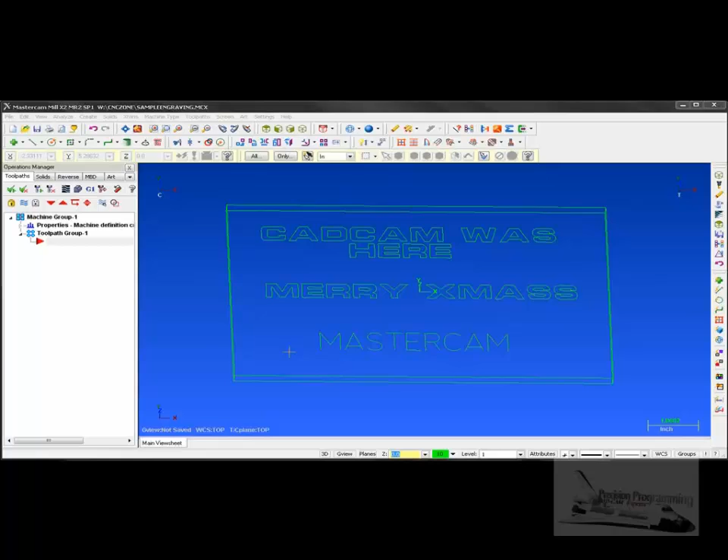We're going to go ahead and use the information on the screen right now. I'm going to put this in top view and adjust that a little bit.

Right here I'm going to use standard engraving. By standard engraving I'm going to use a contour option, so I'll use toolpath, contour. This is sample engraving, that's fine.

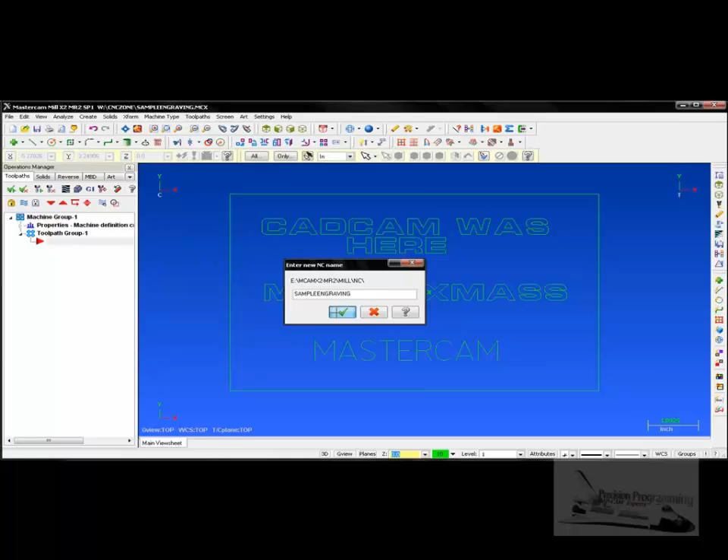Using my chaining option, I'm actually going to use the option for window, so I'm going to put a window around where it says Mastercam. Now it's asking me for a sketch approximate start point.

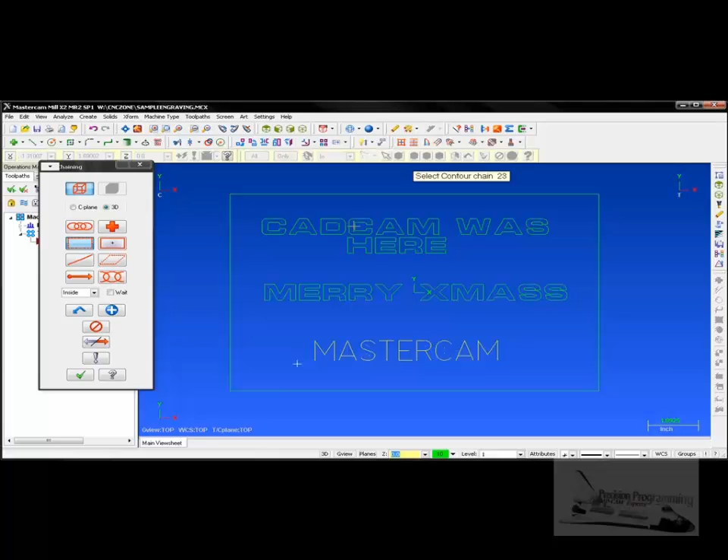Looking for a tool. In this case I'll go ahead and say none, and I'll use a spot drill. We'll say ignore, see what we have in our list. I'm going to use a 125.

Okay, I'm not worrying about the feeds and speeds at this time. Rapids, everything's good. Go over to contour parameters.

I'm going to look for, say, minus 0.005. Maybe multiple passes if I wanted, so I could say 0.002, 2 thousandths pass per cut.

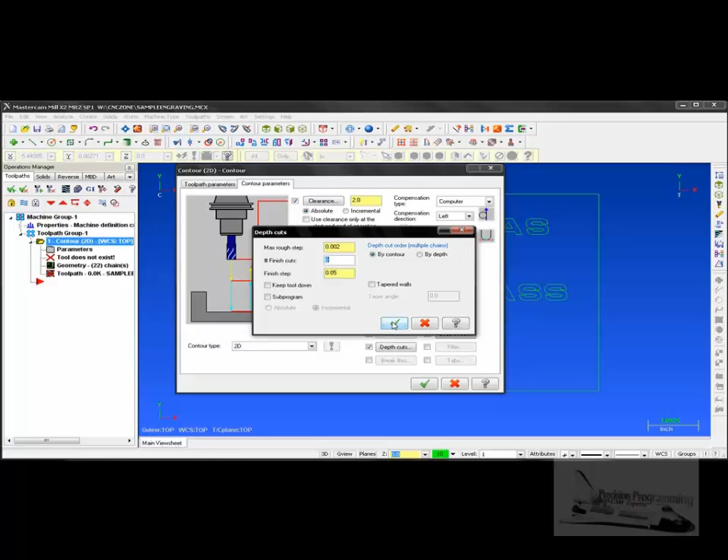I'm going to turn off the lead in and lead out because I don't want the tool to create like a lead in and lead out, making it look like calligraphy. But what I do want is for the tool to go right down the center of these letters. You can see we have stick letters, and I'd like that tool to go right down the center there.

So to do that easily, I'm just going to go over to here where it says computer, control, wear, reverse, wear, and off. I'm going to use the option for off. This will drive the tool right down the center of the letters. I'll go ahead and say OK.

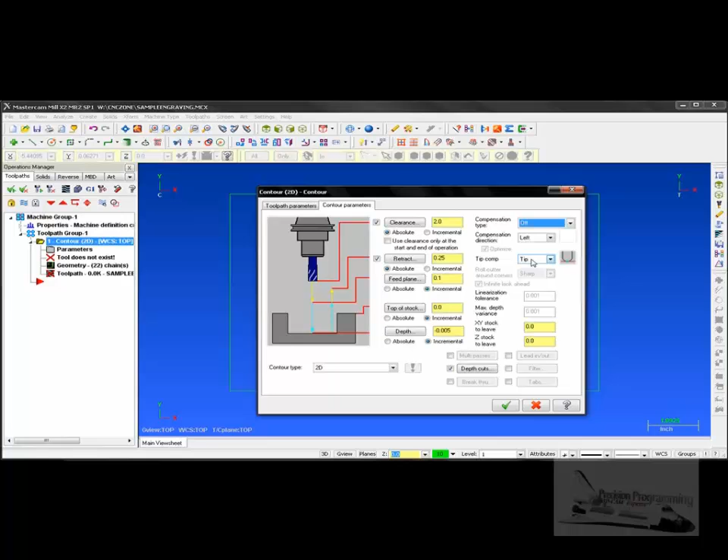As you can see, it actually drove the tool path. The tool itself, let's go ahead and turn this off so you can see right here, right down the center, with multiple passes covering each letter.

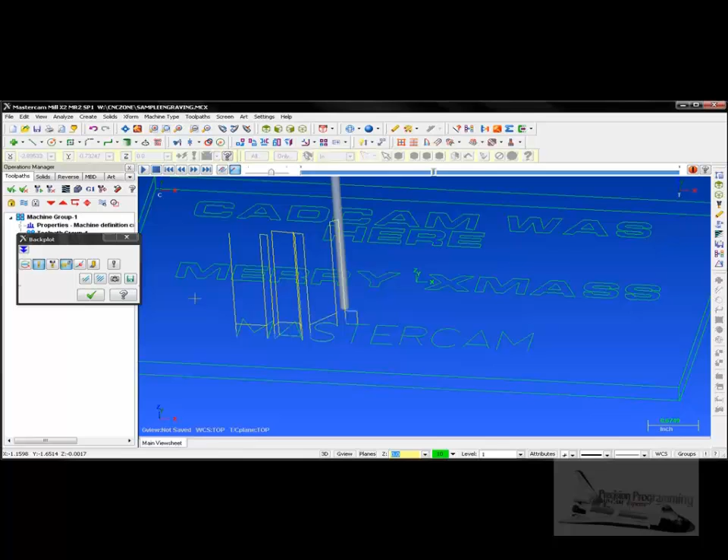Alt-T shuts off my tool path for me. Put it back in top view. I'm going to go through over now and actually use CAD CAM was here and do a

pocket so that I can have letters engraved down into it. Where you could do the reverse though is actually having raised letters by using these as your islands and using the outside profile to actually leave your letter standing.

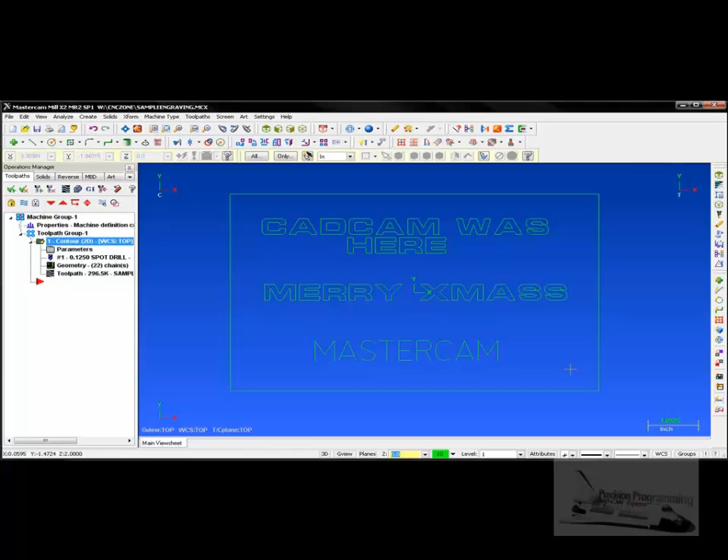So I'm going to go ahead and do toolpath, pocket. I'm going to try the window option again, selecting everything here, using a sketch point which can be anywhere I want, to find the geometry.

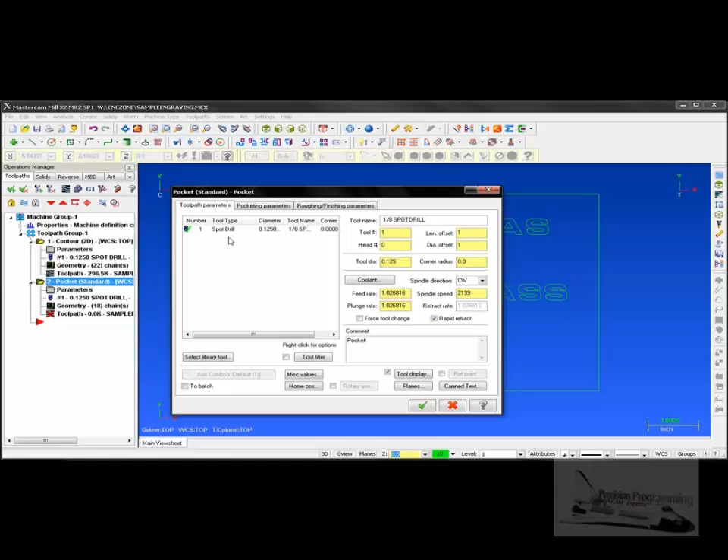In this case, maybe I might want to use that same tool, or for example, let's go ahead and use a 1/16 end mill. I'm going to use a flat end mill. Find that flat end mill.

Not worrying about feeds and speeds this particular time. Pocketing parameters, I'm going to go ahead and say minus 0.010, maybe 10 thousandths step. Going over to my secondary area, rough passes.

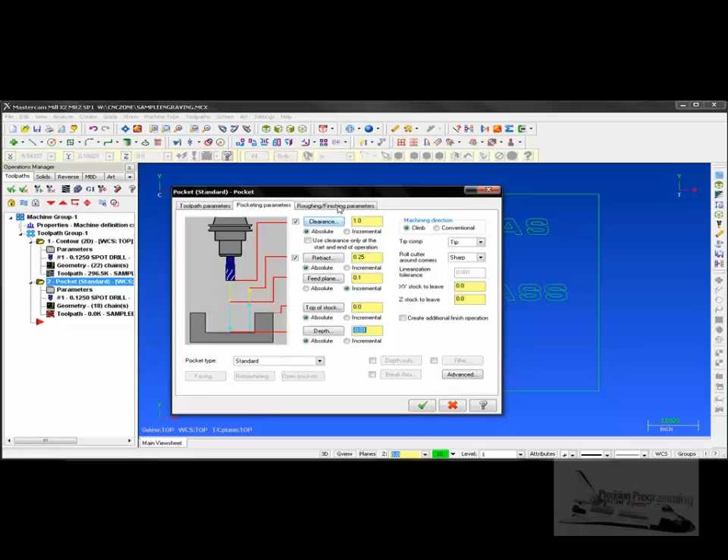I could do depth cuts if I want, but in this case I'm just going to go over roughing, and I'll go ahead and say 40% of my tool. Inside out is fine with me at this particular time.

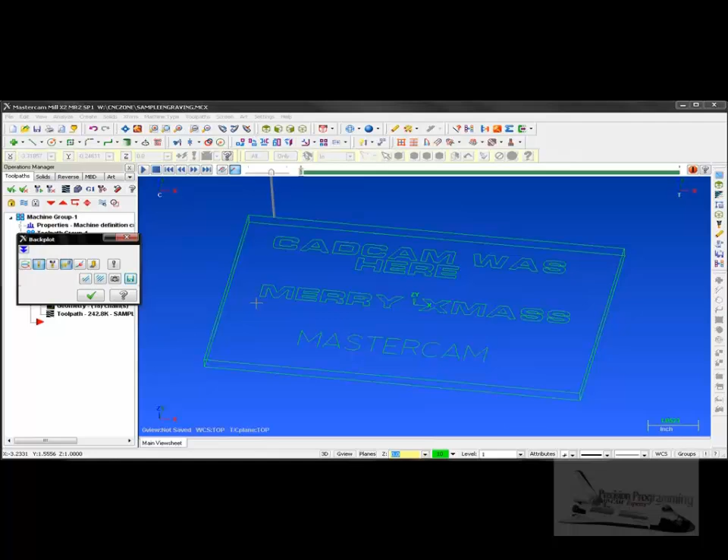Let's go ahead and see back here again, see, did it actually cut inside that area for me? Okay, so just using a standard pocket.

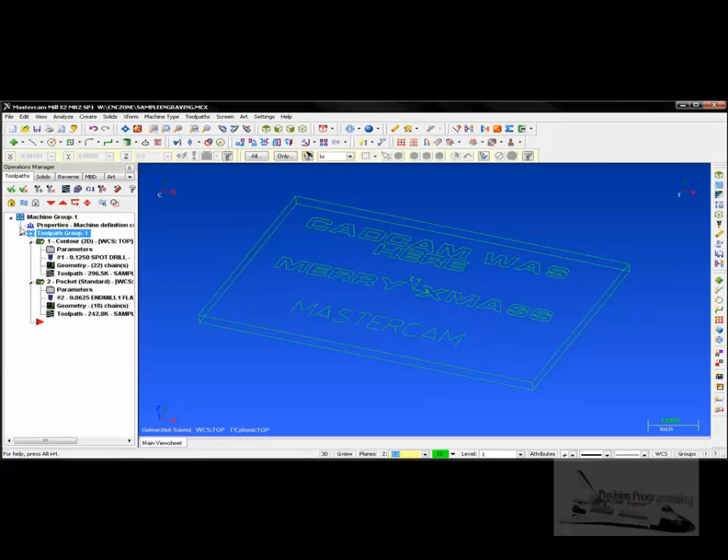So if I actually set this and go ahead and put this in like an isometric view, select both of these right now, let's go ahead and verify that our stock is set up. Looks like we do have our stock set up.

We're okay, we'll go ahead and do a little bit of verify real quick. Move this over, around a little bit. Maybe we might want to see where the information is going, so I can turn on my verbose mode and I'll go ahead and hit play.

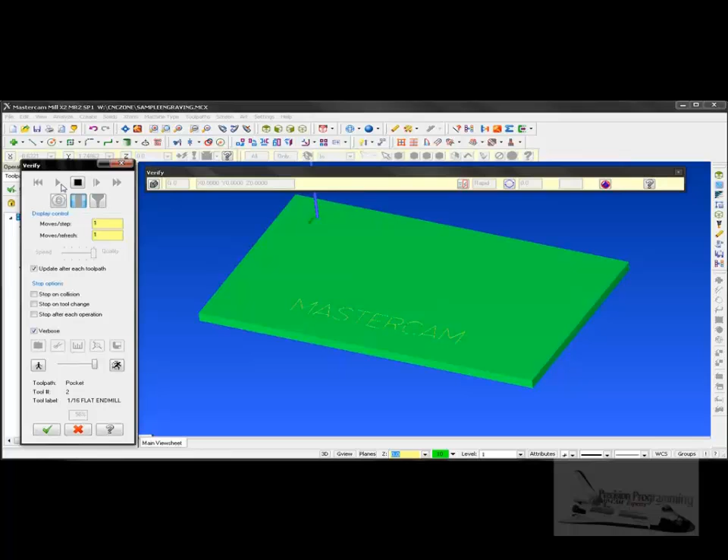As you can see, we have right down the center with the tool, and then we also have the option of pocket. Using the pocket, it creates nice little letters too, and of course it's going to use the tool radius to leave corners on that.

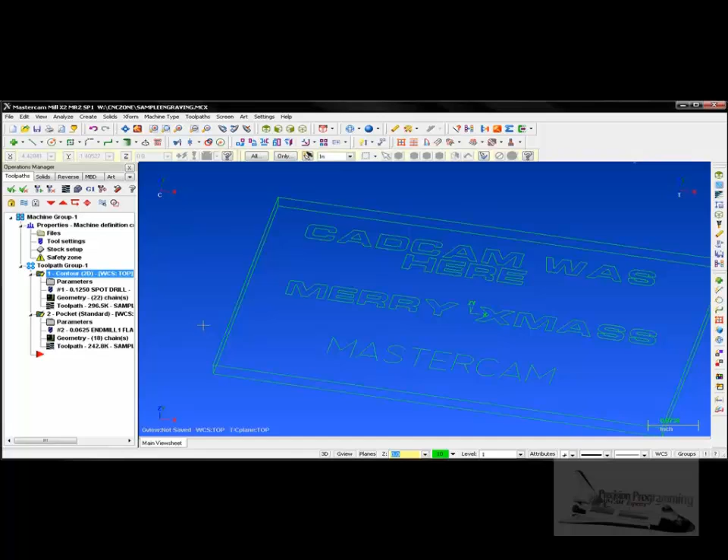Alright, I'm going to put this back in top view again, and use toolpath with the optional engraving package. I'll do the same thoughts I've done in the past, using the window. I could chain each one individually, but in this case it's much easier to just put a window around this. So I'll sketch a point from the right this time.

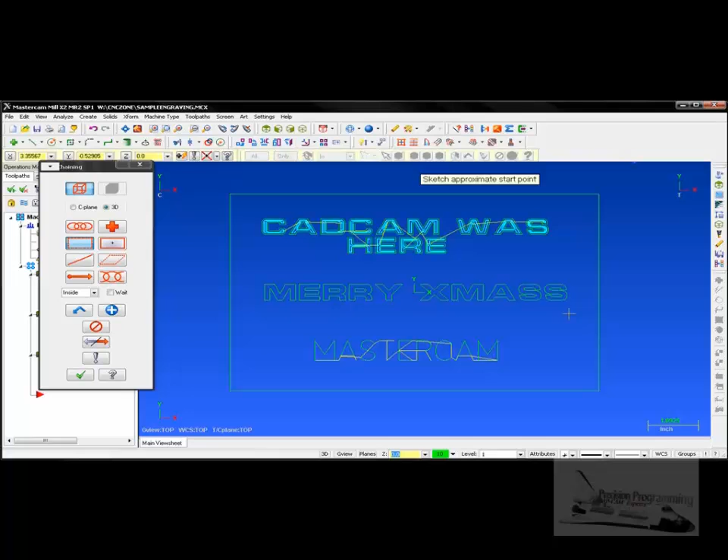Looking at what my note says here, sketch a point for everything that's inside that window. Go ahead and do that, then apply that. This time I'm going to go to the tool library, filter it out, say none, and use a chamfer mill.

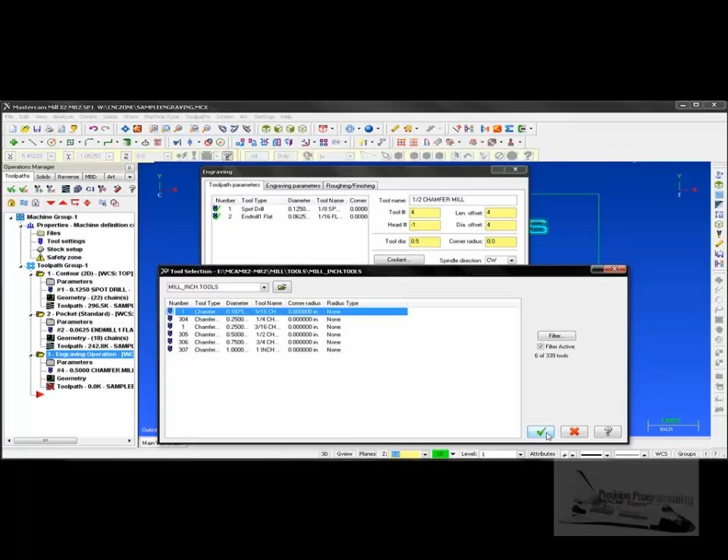Say OK, I'm going to use a 3/16 chamfer mill in this case. It looks for the angle and already knows what the angle and everything is, so I'm not worrying about feeds and speeds. For parameters, I'm going to say 1 inch above.

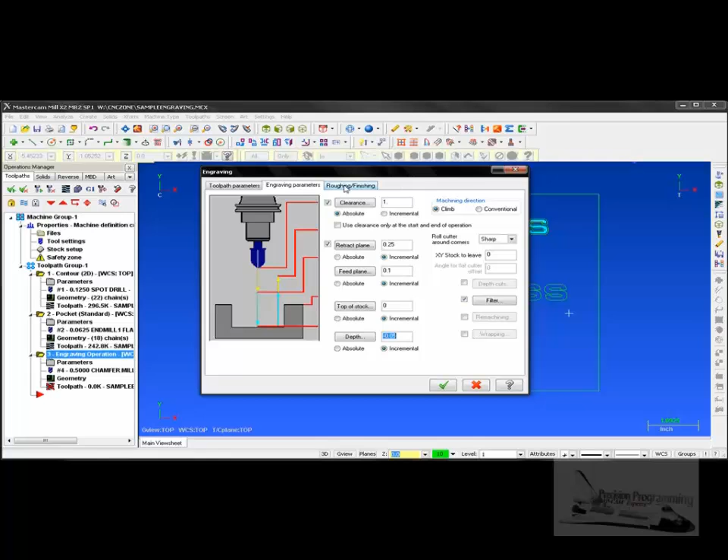And we can go ahead and say minus 50 thousandths for this particular time. Coming over to the other options, roughing and finishing - do I want to do some roughing passes? I wanted to rough out some of the detail if they were wide enough letters, so in this case I could go ahead and use that option.

Say parallel, for example, for how much of the step over percentage of the tool. I've got a small tip on it, so I'm going to say 30% to get a little detail in there. I can have it actually ramp into the material or plunge, smoothing as it's going through the particular pocket areas as it also roughs.

Now we have an option to cut the geometry. As you can see, it's showing a letter here with the top being crisp or the bottom being crisp. In this case, I want to go with the top. What I want it to do is have the tool go in there and clear out the bottom area, but when it sees the sharp corners, I want it to lift up into the corners and create almost a sharp corner. Alright, I'm going to go ahead and say OK.

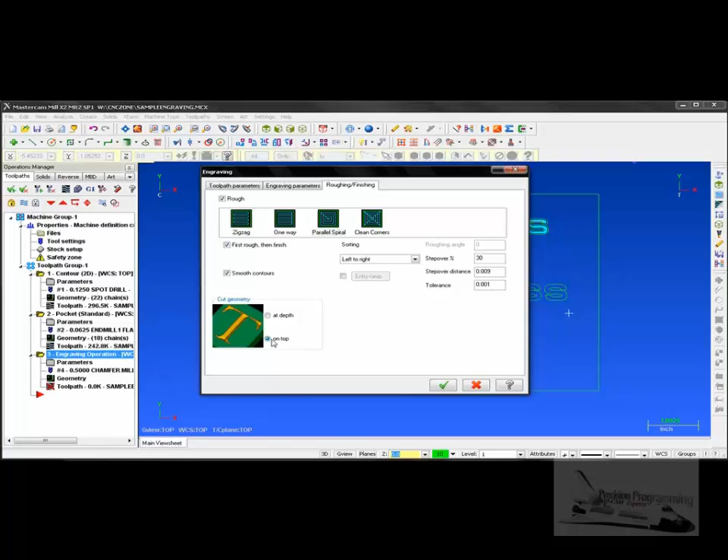Generate a path, and I'm going to zoom up on this path here so you can see where the tool has actually done that. It's come up into the corner area here. So if I back plot that, let's turn off that path right there and see where our tool is. Zoom in a little bit right here.

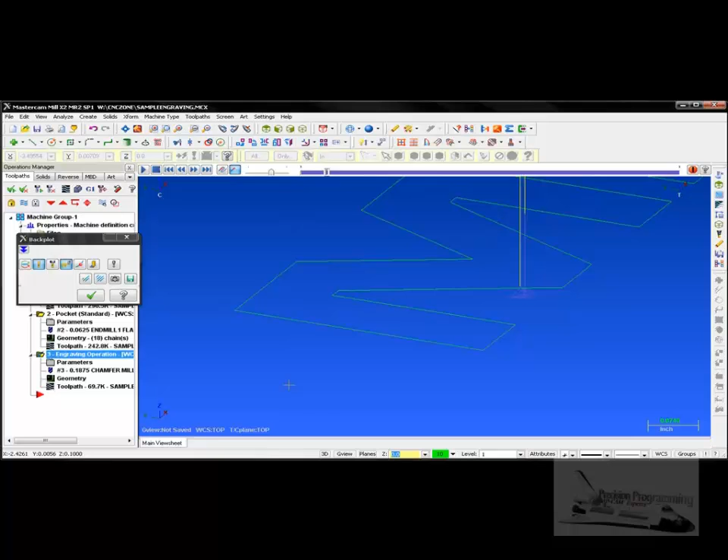I'll use the S on my keyboard. You see it's inside the cut, moving around a little bit. It's going to go through and do some roughing passes real quick - let's get it to go down. Now you can actually see, so it went up into the corner.

It's going to move along here, then come right up into that corner. It's going to automatically lift up into the corner, creating a much sharper detail in the corner area.

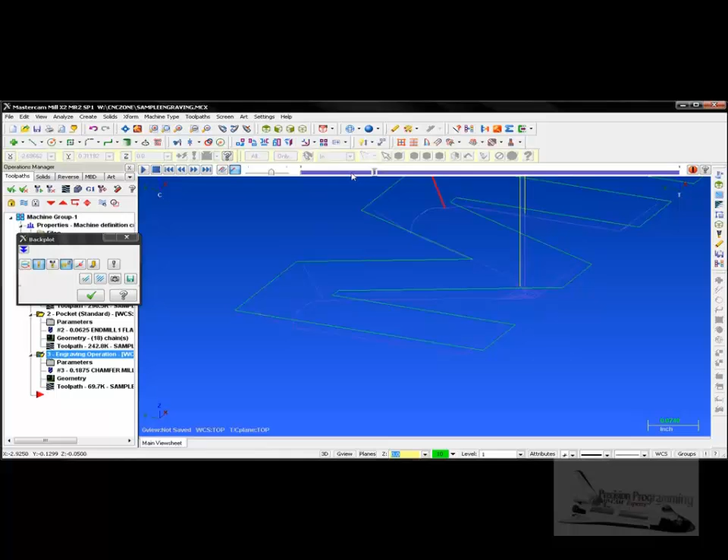So you can see - I'll go ahead and select all of them. Alt-T turns off all my tool paths. Everything's selected, I'm going to use the verify. Zoom in a little bit over here, let's go ahead and move this out of the way, and we'll let it play through. Tell it to stop on tool change.

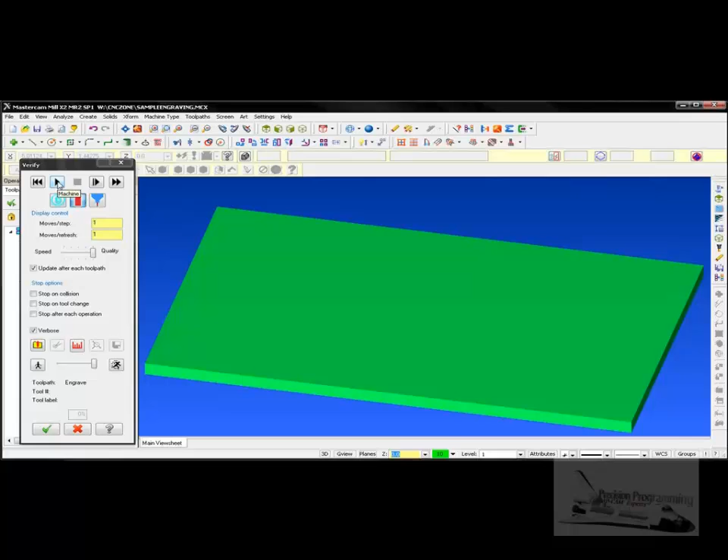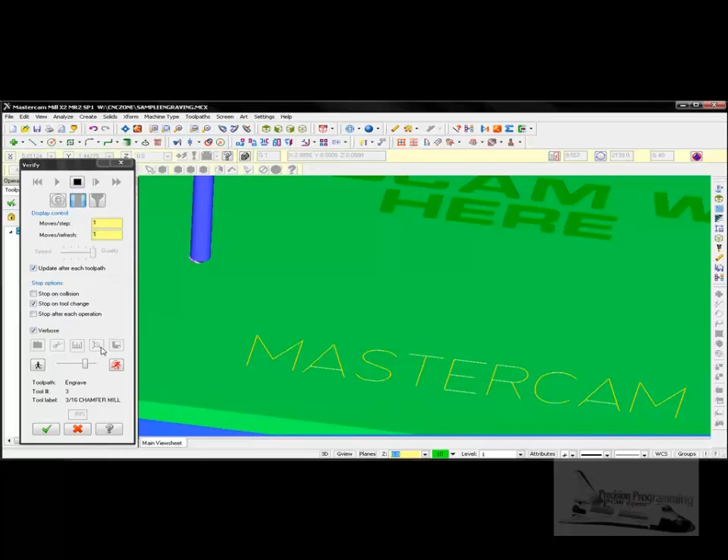Going through each tool, I'm going to go ahead and slow the next tool down. Zoom in a little bit right there. It's going to do a little bit of the roughing detail, what it can with that particular tool, just taking out where the larger areas it could, and then it'll come back. If we had a more defined, smaller tool, we'd probably get more definition, step overs, and information like that.

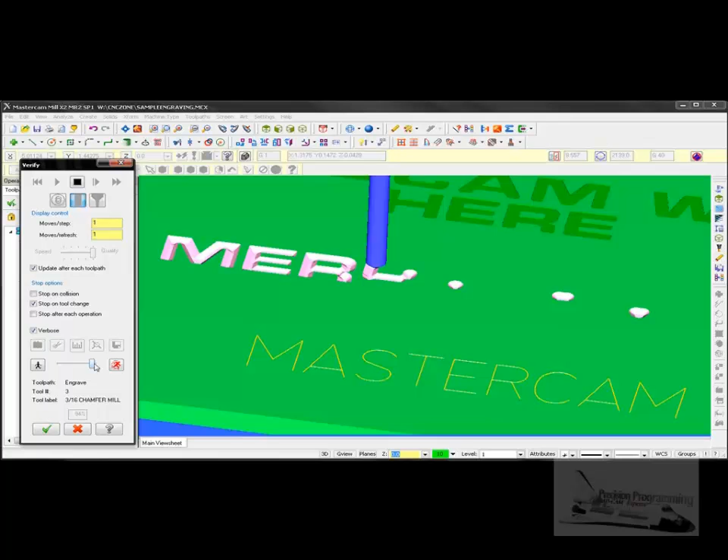Go ahead and bring this up a little bit. Let's go ahead and speed that up, so you can see that it actually moves the tool along the top and brings it up into the corners.

Makes for a nice option, a lot of time used in mold making and things like that. But you can see you don't have to have the fancy engraving package to be able to do engraving - you can do standard contour, standard pocketing. If you do the reverse thought here when it came to these actual letters on the top, where I did a pocket basically picking an outside boundary being the stock and picking the letters and using them as an island, you can actually leave raised letters.

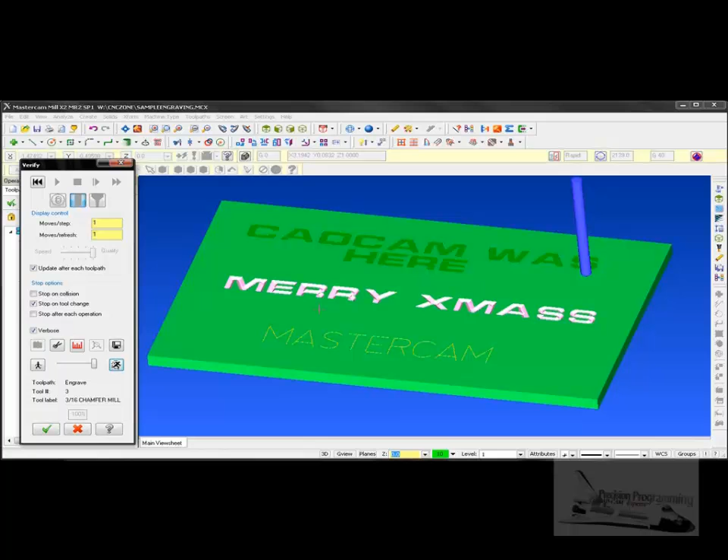Well, this is it for the engraving samples that I have for you now. I hope this helps, and I hope you enjoyed my time. Thank you.